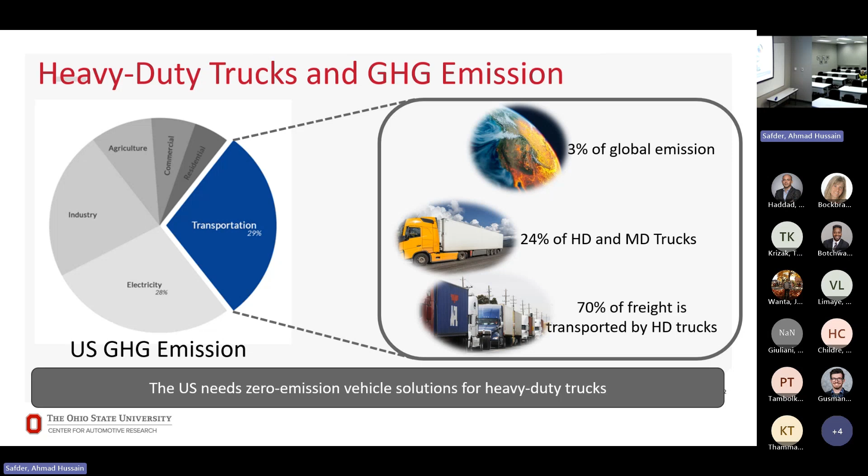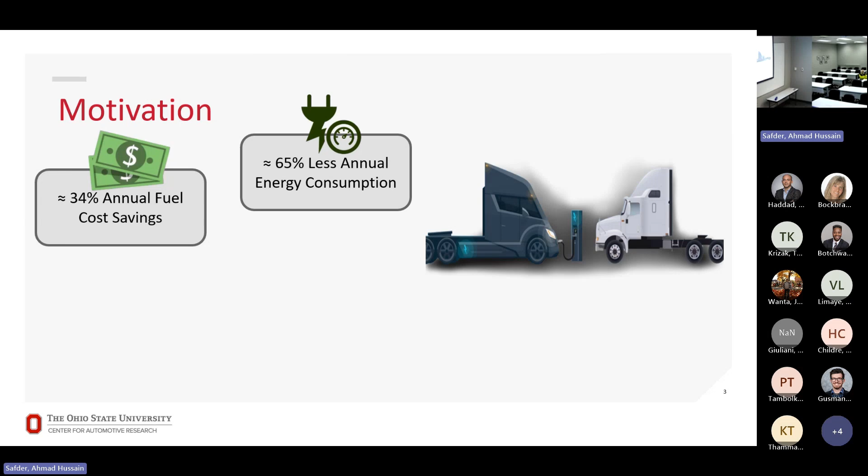This emphasizes the importance of electrifying our heavy duty trucks. Electrification of heavy duty trucks gives us huge benefits over diesel or conventional trucks: a 34% annual fuel cost saving, a 65% reduction in energy consumption, and electric vehicles can provide 2.5 times more powertrain efficiency. If we talk about well-to-wheel emissions, there are huge reductions in gases, including carbon dioxide, NOx, and carbon monoxide. This shows that electric trucks offer a sustainable alternative compared to conventional diesel trucks.

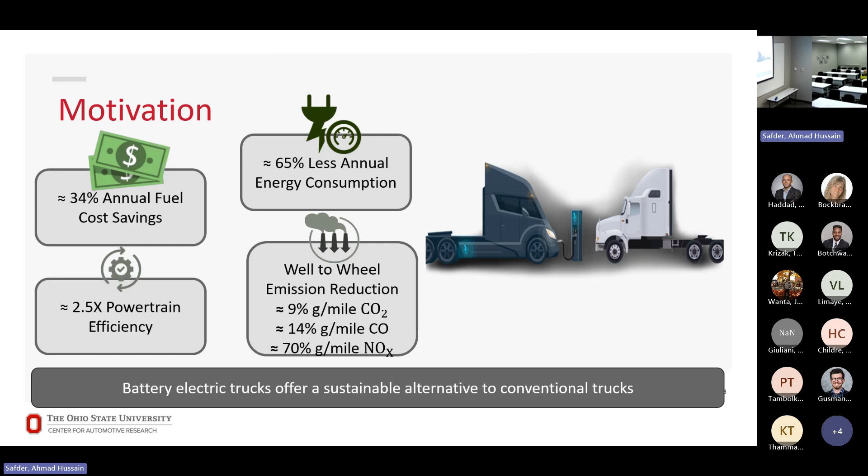The effort of electrifying our heavy duty trucks and developing zero emission vehicle technology is connected to the PACCAR Supertruck 3 project, funded by the Department of Energy. One of the major goals of this project is to develop zero emission vehicle technology, extend range, and improve freight efficiency. Our contribution to this project is to minimize energy losses by means of advanced powertrain controls, because powertrain controls are required for energy efficient operations.

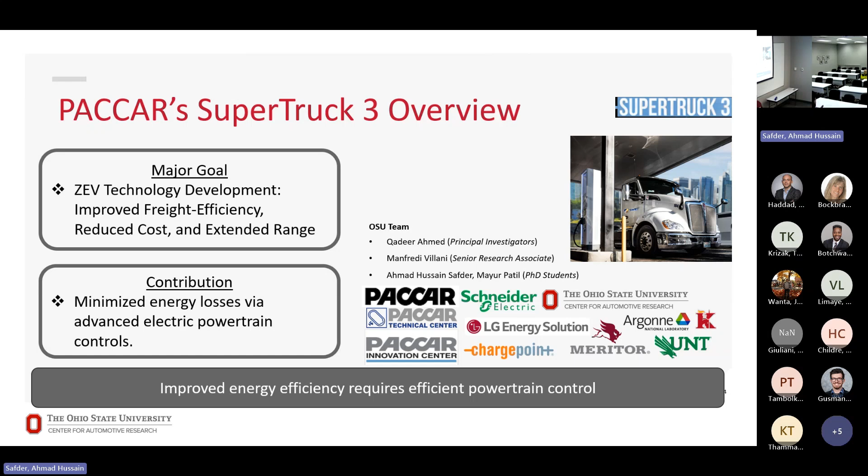So before we dive into the powertrain controls, it's important to understand the powertrain of an electric truck. The powertrain is very simplified: we have two e-axles. Each e-axle is a combination of an inverter, a traction electric machine, a heavy duty gearbox, and a differential, and they are directly coupled to the tires. Here we have the batteries, large batteries, which provide power to the traction electric machine, which eventually goes to the wheels.

Each component in this powertrain architecture has 95% efficiency, except for the traction electric machine. The traction electric machine can go from 70 to 95% efficiency, but it depends on how you are operating that machine. So from this powertrain architecture, we can see that it's very important to operate this electric machine efficiently to have energy gains.

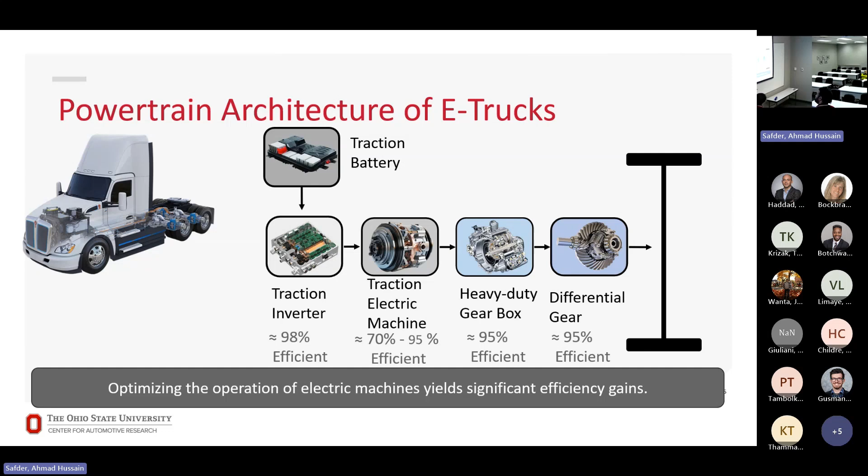If we talk about a well-known vehicle model, F equals MA: this is F, this is A, and this is M. This is the load, the force acting on the wheels. This is the road load equation, which consists of air drag, rolling resistance, and resistance due to road grade.

We are talking about trucks, which start from 17,000 pounds up to 82,000 pounds when fully loaded, so this mass is a very significant value. In the air drag term, mass is not present, but in the rolling resistance term, mass is there, though it's multiplied by a rolling resistance coefficient which is much less than one, so it can be catered for.

But the gradient resistance is directly multiplied by the gravitational acceleration and the sine of alpha. The sine goes from 0 to 1; 0 in the case of no road grade, only a flat surface. But since G is 9.8, if the sine is 0.5, it can make the resistance 5 times the vehicle mass. If fully loaded, that's 5 times 82,000 pounds, which is a very heavy and dominant force in the case of gradient.

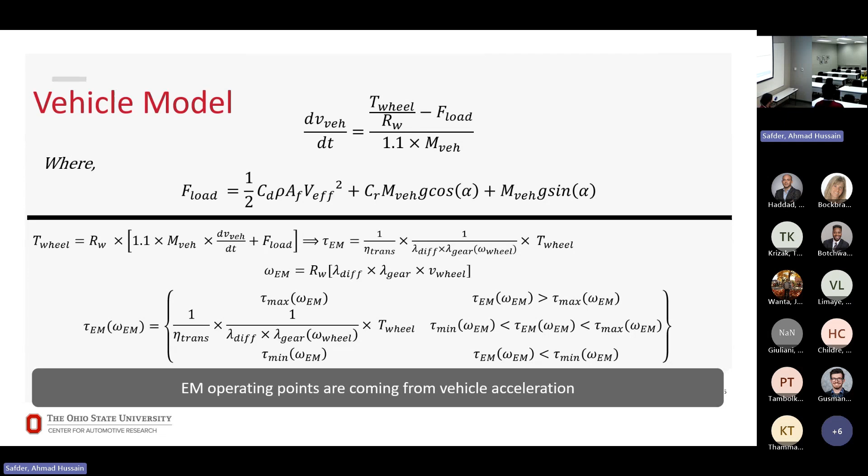So my approach to cater to this, since acceleration gives me the operating points of an electric machine, is that I used look-ahead information. From that look-ahead information, I generated an optimal acceleration profile for the electric truck. From the acceleration, I can take out the value of the speed and the value of the torque required.

So what I want to do is accelerate optimally. How can we accelerate optimally? If there is an uphill, we can slow down a little bit. When there is a downhill and the grade is negative, we can speed up our vehicle, or we can lift off the gas pedal so that more energy can be recovered. So for that optimal acceleration, I formulated an optimal control problem.

The optimal control problem: this is the power at the wheels. What is the power? Power is the product of the F load and the velocity, and this is the vehicle velocity. And the power into dt, integrated, becomes the energy.

So the first part of this cost function is the energy required at the wheels, and the second part is your deviation from a set speed. If you want your vehicle to go at 55 miles per hour, and you also want some energy savings, this term captures how much it can deviate from the 55 miles per hour. In the case of an uphill, you can say the minimum I can go is 50 miles per hour, so it will respect that.

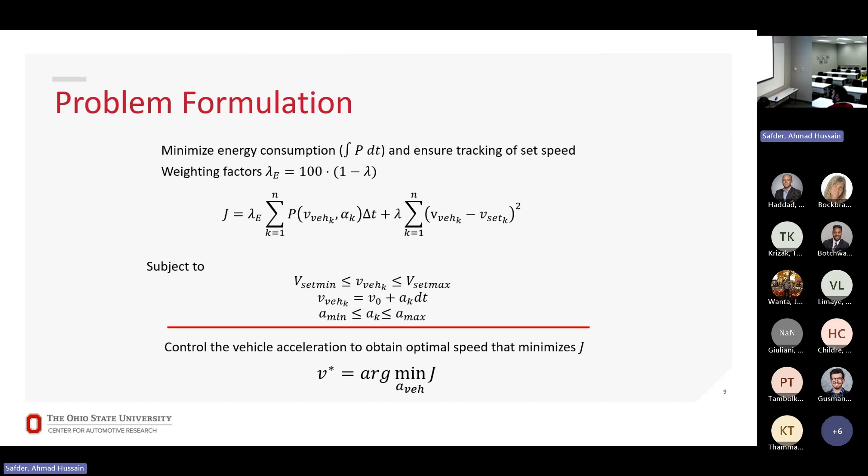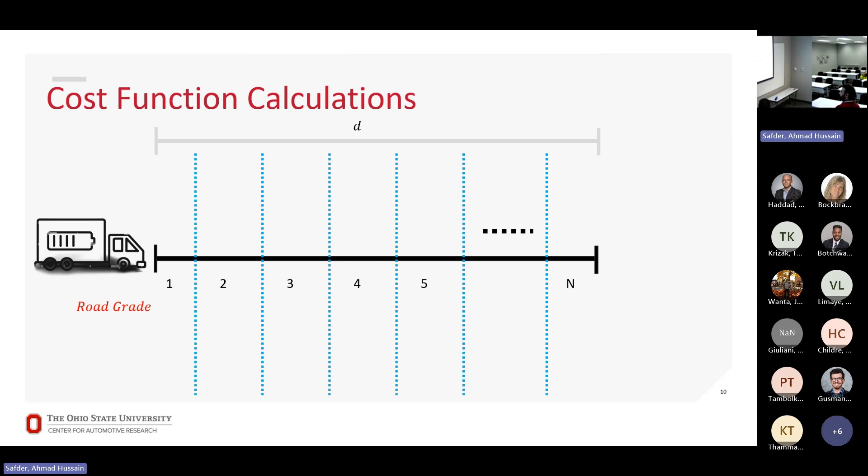So how will the vehicle adapt for the road grade? If we have this vehicle here and a road ahead, the vehicle can look ahead for a distance d, and within that distance there are n segments. For each segment, it calculates the power and the deviation from the set speed. Since it is a distance-based optimization, it calculates the time as well, as dx over v. The dx is the total look-ahead horizon divided by how many segments you want in it. If you need 10 segments, each segment will be 10 meters — within a 100-meter horizon, it will have 10 values to optimize.

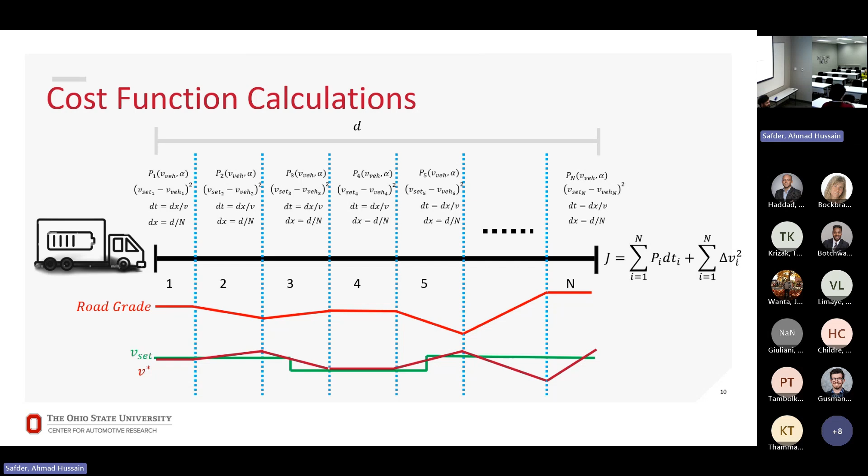In this method, I use sequential quadratic programming to get an optimal solution for this cost function. And how that SQP algorithm works - I'm showing one iteration of this algorithm, how we can calculate the optimal acceleration.

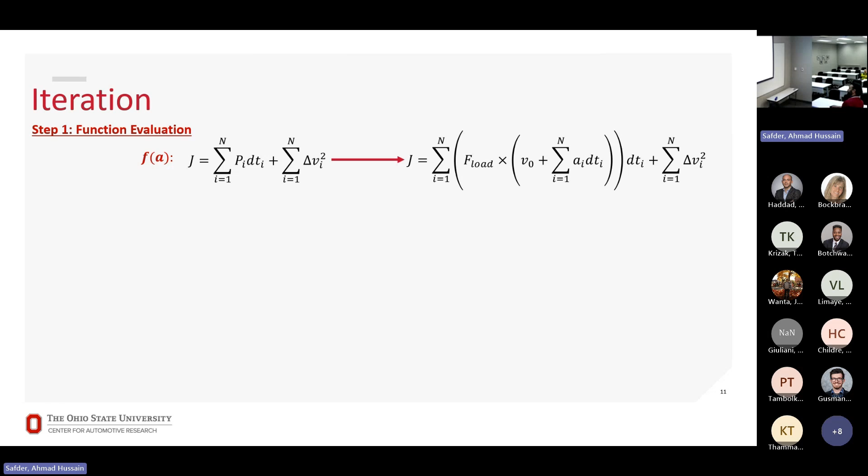The very first step, compute function evaluation. So based upon, we were minimizing the cost function with respect to acceleration. So this function should be a function of acceleration. The cost function is given as a function of acceleration.

And there are certain constraints for that. This is a cost function with those constraints. Constrained optimization can be translated into unconstrained optimization by using a Lagrangian. So we took the Lagrangian over here.

This is less than inequality constraints, and this is the equality constraint. So there is no equality constraint, and there are four inequality constraints: speed should be less than V minimum, or speed should be greater than V minimum, it should be less than V max, and similarly for the acceleration, it should be within the range of a min and a max.

And the primary feasibility is if these constraints are met. So this G as a function of A should be less than or equal to 0, and H of A should equal 0. If these constraints are 0 and we got the value of acceleration, it is a feasible value of the acceleration. If any value of acceleration violates this feasibility, it is an infeasible solution. So here we got our first guess, and now how we can go forward for our next guess.

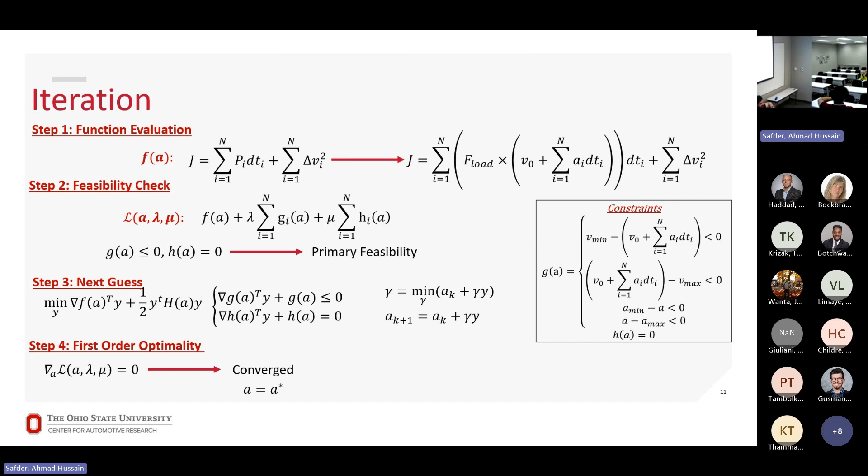So this is how we are calculating the optimal acceleration during one iteration. So here we got the optimal acceleration, and here we got the results.

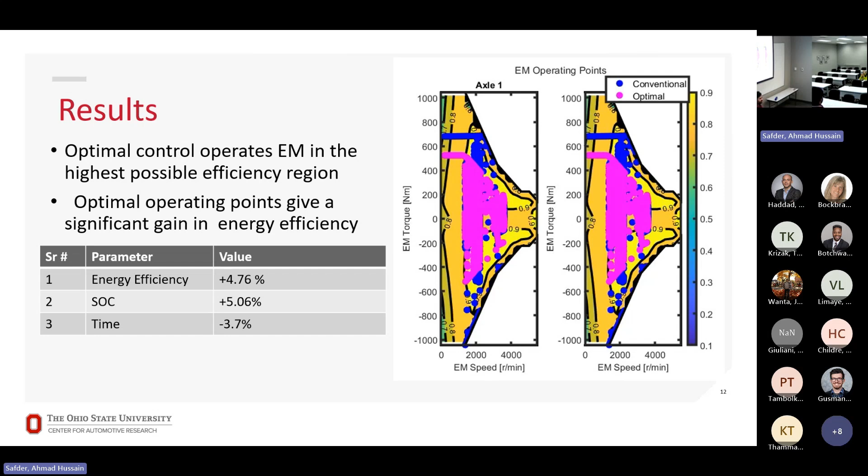The time is increased by 3.7% in the case of optimal acceleration. So at this point, we have operated our electric machine within optimal operating points. But is there any other way to improve the efficiency of our machines further?

We have two electric machines on both e-axles, and at this time we are splitting the torque evenly. So if we need 1600 Newton meter torque, they both give 800 each. If I request 1600 Newton meters at this speed, they both give me 800, and the power loss is 20%, so total efficiency is 80%.

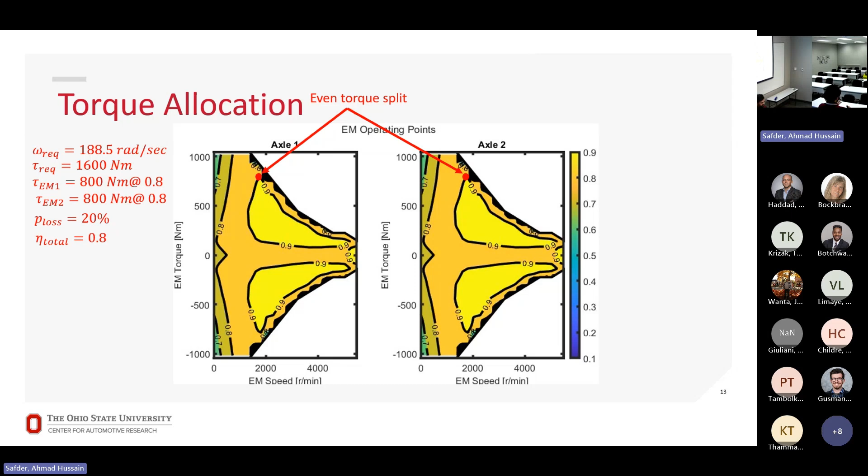With the same operating point, we want to increase the efficiency. So at this point, we are splitting the torque between the two electric machines efficiently. The same amount of torque is requested from this algorithm, but it gives 850 Newton meters from one machine and 750 Newton meters from the other.

The power losses in the even split was 20%. The power loss in this optimal split was 18.48%, giving us the same power with an efficiency of 80% versus 82% efficiency. This shows that accelerating optimally alone will not solve all our problems; we also need to allocate the torque optimally to both electric machines.

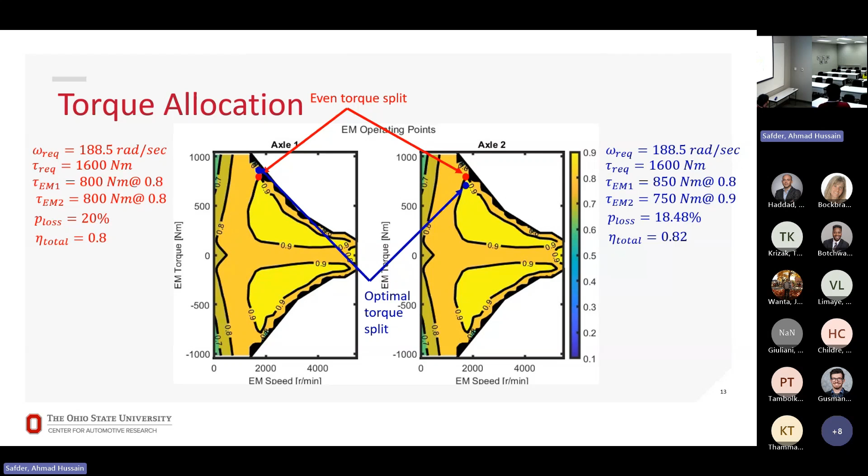So it depends on one more step in this technique: first you have the optimal acceleration, which gives the optimal operating points, the torque and speed values, and then there is a powertrain level control which allocates the torque to both electric machines.

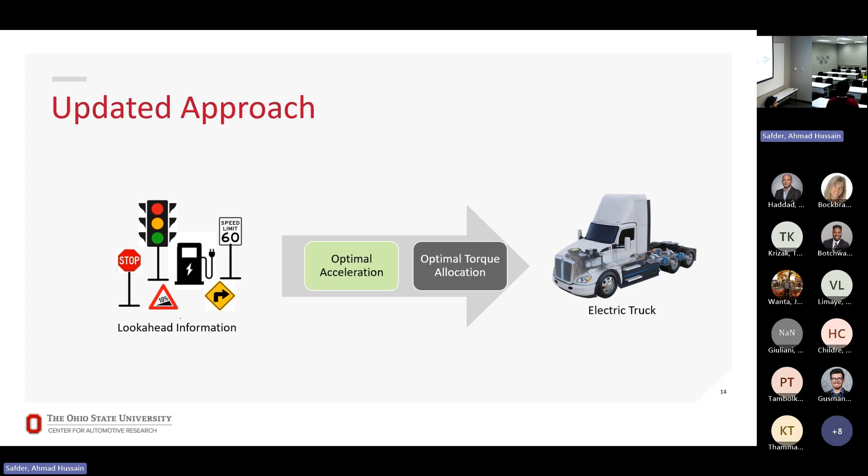If we are getting 50% from this machine, there will be 50% from the other one. If we get 40% from here, then 60% should be from the other. So the total 100% torque should be allocated between both e-axles. So how is it calculating that?

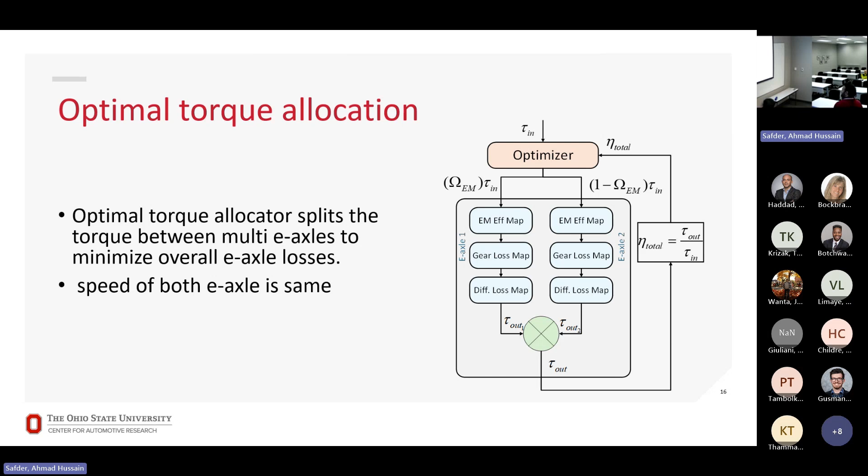And then it goes back to the optimizer, and this optimizer minimizes these losses. So again it will be an optimal control, and we need to formulate the optimal control problem for this optimizer.

This is an optimal control problem formulation for torque allocation. This is the power requested, so the torque request and then omega request. These are the operating points coming from the optimal acceleration. These are the losses at the electric machine, these are the losses at the gears, these are the losses at the differential gears, and this is the total efficiency.

So the cost function says this is the energy loss at the powertrain, and we are minimizing the energy losses at the powertrain so that we can allocate the torque optimally. The condition in this optimal torque allocation problem is that the gear numbers on both e-axles should be the same, and both e-axles should run at the same speed, otherwise there will be a slip between cars. And this torque allocation ratio should range from 0 to 1, or 0 to 100%.

And the SOC should remain within the allowable range. So this calculates an optimal torque allocation by minimizing the cost function with respect to the losses. 1 minus efficiency is giving us the losses. So this is the cost function, and we need to minimize it.

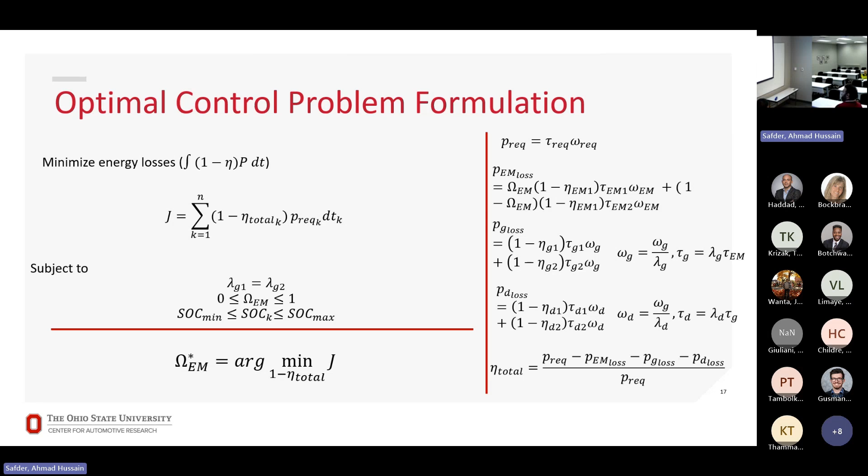Again, we need a solver to minimize this cost function, so I choose the SQP routine. This SQP routine is similar to a previous one. First step is evaluate the function. We are minimizing with respect to the torque allocation ratio, so this cost function should be a function of the torque allocation ratio.

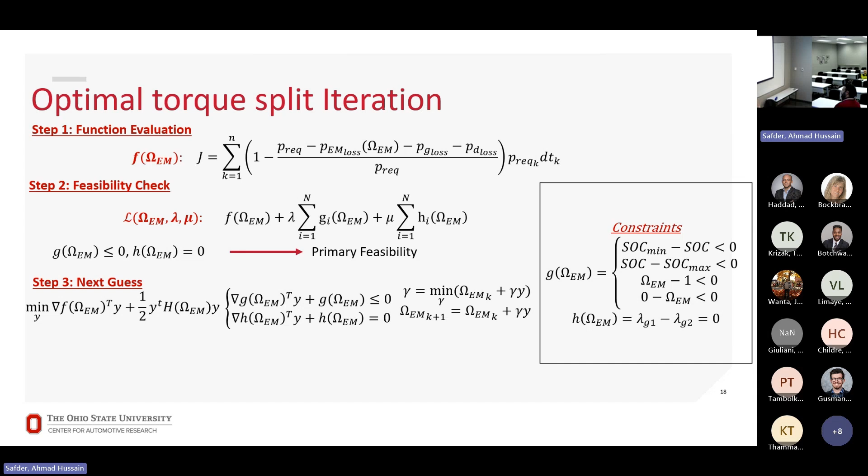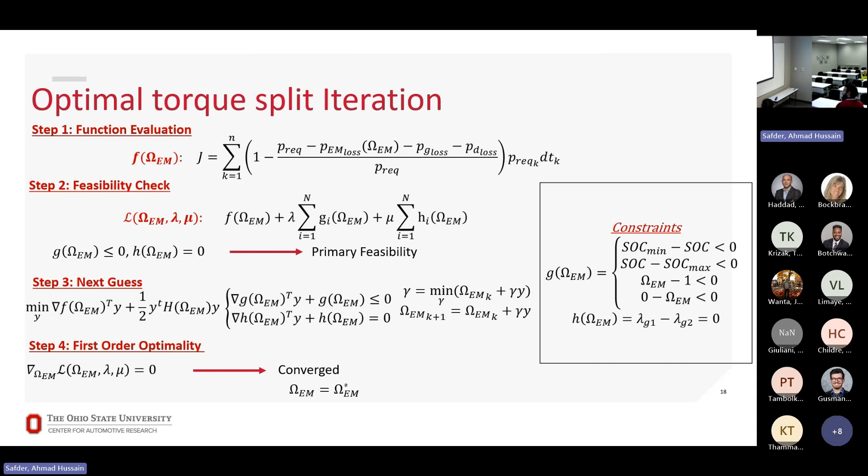There are certain constraints. We are calculating the Lagrangian to make it a constraint optimization problem, checking primary feasibility. The next guess is the same, going about what is the direction, what will be the step size, and after knowing the step size and direction, from a linear approximation we can calculate the next guess of the torque allocation. If it fulfills the KKT condition for a first order optimality condition, it is declared as the optimal value of the torque allocation.

So from the torque allocation, at these operating points, we give the OTES, meaning optimal torque even split, which was the first method in which we extracted the optimal torque from the optimal acceleration, and it was an even split. And OTOS means the optimal torque optimal split.

So we can see that in the region shown in red, both figures are not the same. At this point, it is extracting less torque from this electric machine to save some energy. So there are some points in which we don't need both electric machines running. We can take the torque from the first one and save some losses there.

So just by allocating the optimal torque for the electric machine, we increase the energy efficiency. The previous one was 5 point something, so with this we gain 0.68% more energy efficiency and more SOC increase.

And there are EM losses. The EM losses are reduced significantly - there is a 6% reduction in the EM losses just by allocating the torque optimally. And when the losses on the machine are very low, it will increase the machine's life.

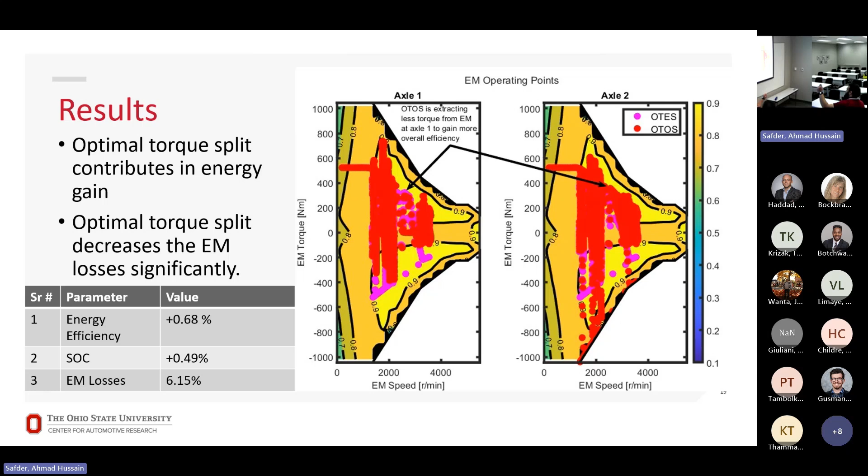So in the first step, we calculated the optimal operating points by calculating the optimal acceleration. And in the second step, we have those optimal operating point values, and we just allocate those to both e-axles optimally.

So this is an overall block diagram of this scheme: from this look ahead information, it generates an optimal torque, an optimal acceleration, and the integration of acceleration gives the speed. And from F equals to MA, we get the force, and from the force we can extract the torque. So here's the torque - the first step gives us the optimal speed request and torque request, which is an operating point.

This operating point goes into the optimal torque allocation, and then it gives this optimal torque allocated optimally to both electric machines. From this electric machine we get the output, which goes into the gearbox, and the gearbox output goes to the differential. And here we have the tires, which run the front. So this is the complete block diagram of that work.

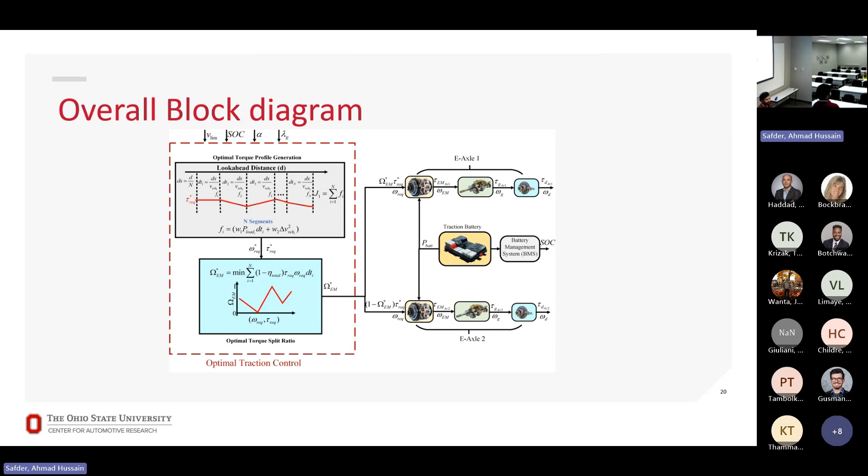I'll just show. So now we'll go to the simulation part, in which we did the simulation of this work.

So we have a route from Columbus to Akron, which is a 222 kilometer route. And the look ahead horizon is 100 meters, with 10 segments, so each segment is 10 meters. So the vehicle approximates the road grade value over 10 meters, and within the look ahead horizon it has 10 values.

These are the weights of the cost function. This is the gear ratio - it is a two-speed transmission. These are the rolling resistance coefficient, which is very small. This is the vehicle mass, which is 32,500 kgs. Frontal area of the truck, this is the air drag coefficient, and this is the differential gear ratio.

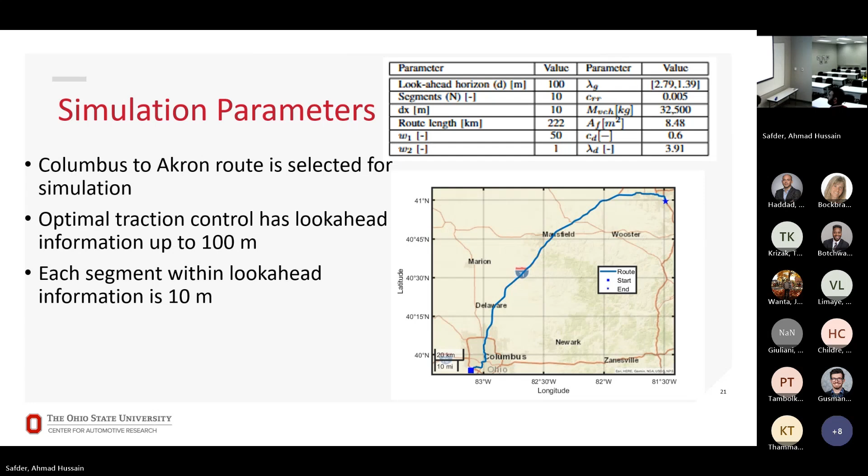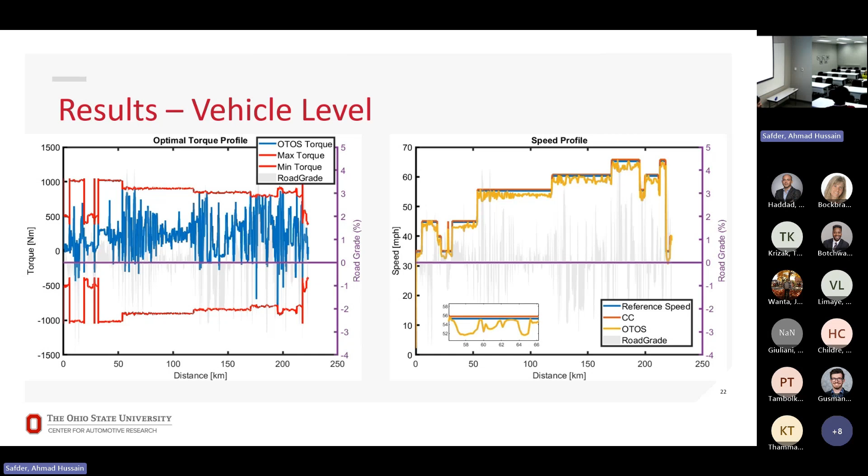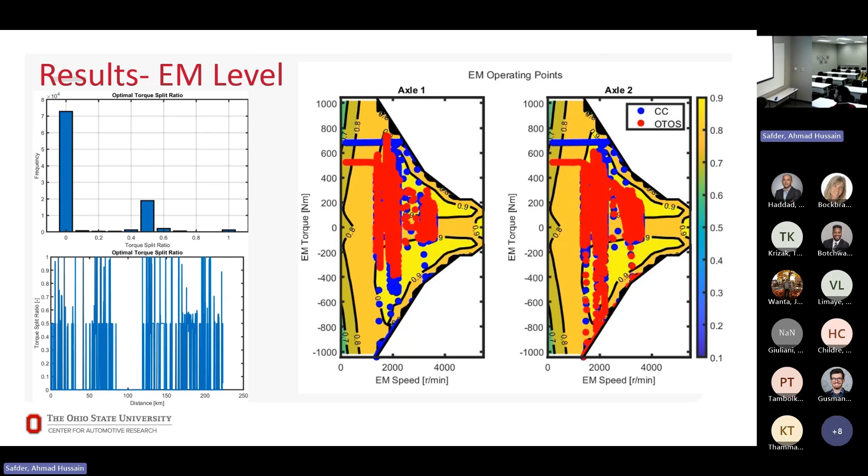So this was the operating point with the proposed traction control and a conventional traction control. So these are the results. The energy gain in the case of optimal torque with even split was 4.76%, but in the case of optimal torque with optimal split, the energy gain was 5.42%.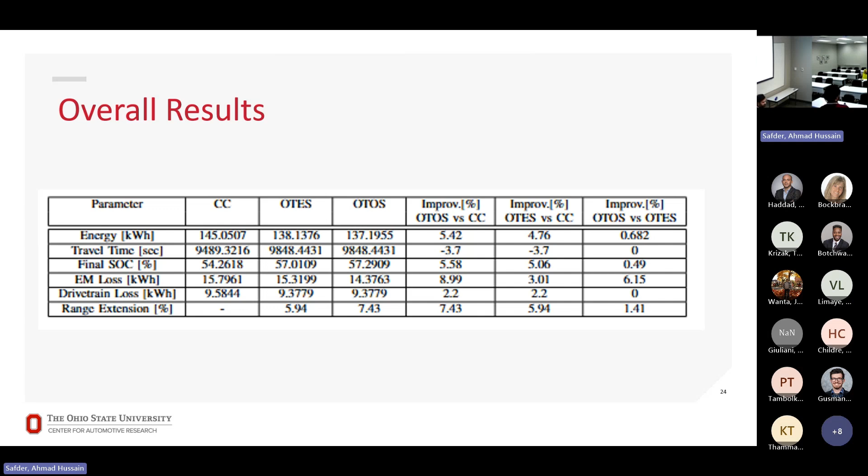The EM losses are phenomenally reduced in the case of the optimal split, and the range is extended in all cases. For optimal speed with optimal torque even split, it gave us almost 5.94% range, and in the case of optimal torque with optimal split, it gives us 7.43% range extension. We didn't change anything in the powertrain, just on the control side. We maneuvered the vehicle optimally and allocated the torque optimally, gaining a range extension of 7.43%. Some part of the range extension comes from splitting the torque optimally, because it reduces the EM losses.

So in this part, we will check the road grade variation on our algorithm, where the road grade was changed by -10% and +10%, to check the sensitivity of how much any parameter is sensitive to a road grade variation.

For the sensitivity, if the road grade is -10%, it is 0.092% sensitive. So it shows that a 10% variation in the road grade is not producing any sensitivity for an optimal control command generation. Similarly, for the +10%, it is almost the same values as the -10% value.

From this road grade variation, we got our results generalized that if there is a ±10% increment in the road grade, we can get a 1% change in energy calculation, a 0.04% change in the time calculation, 1.3% change in SOC results, 0.4% change in the EM losses, and 0.4% change in the drivetrain losses. Drivetrain losses are the gear losses and the differential losses. And the range is affected by 1.2%, with varying the road grade by +10 and -10%.

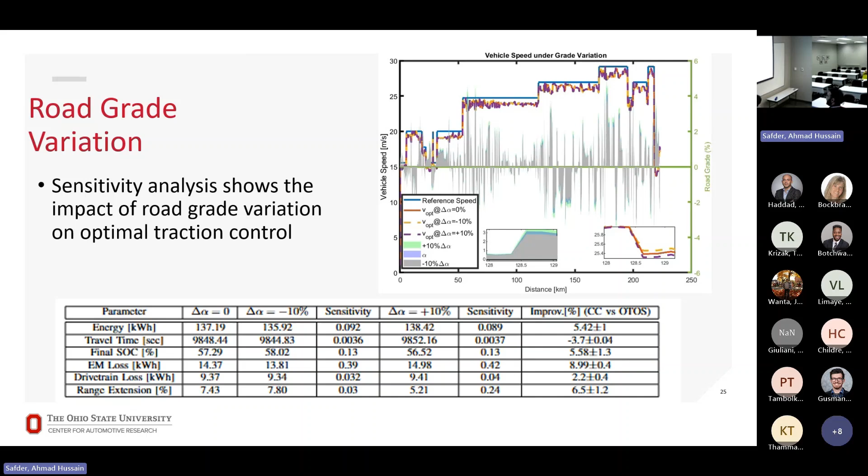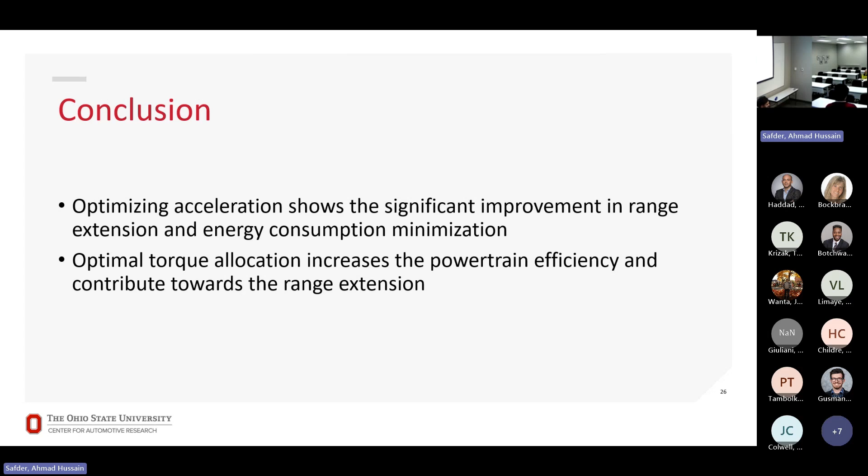So the conclusion of this work was the optimization of acceleration gives us a huge improvement in the range extension and the energy consumption. The torque allocation gives us some contribution in the range extension and energy consumption minimization, but it increases the powertrain efficiency. So the increased powertrain efficiency eventually reflects in the range extension and energy gains.

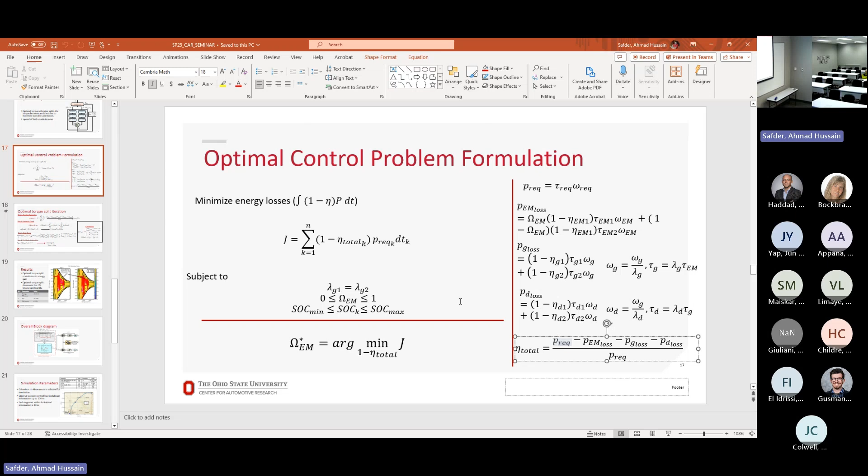Because efficiencies eventually multiply, right? And then you get the total efficiency, but you are calculating it in this way. Okay, so this result, percentage wise, it shows a 0.6% gain with only optimal split, and the optimal torque are provided to both. Let's keep it simple - with look-ahead, how much do you get? 5.42.

5.42, yes. Okay, now with optimal, 4.76. 4.76 energy gains, right. Then with optimal split, how much do you get? 5.4. So these are the two numbers. And then you're expecting machine efficiency, which is around 2%. 2%.

So getting around 7. I think when these gains are efficiency gains, efficiencies get multiplied for the overall. So 5 times 4 times 2 is 0.05 times 0.04 times 0.02. That's the overall. This question is critical when we say, okay, each stepwise, how much are the gains, and eventually when you implement this in the simulations, for sure you will get this accumulative number.